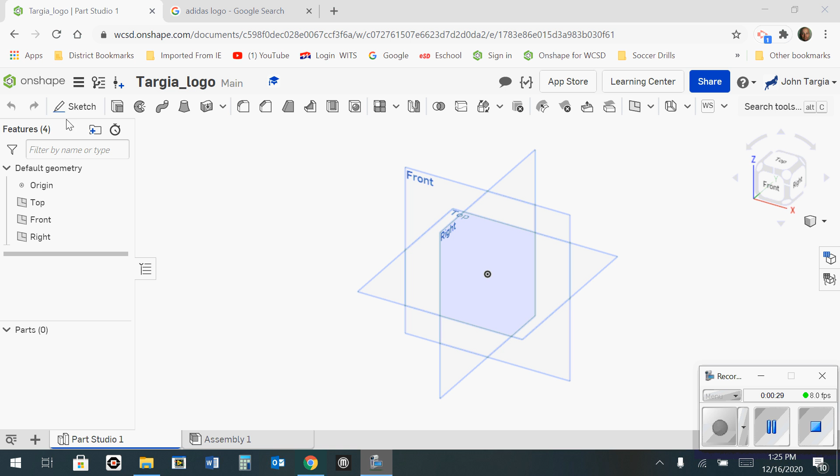So the very first thing you need to do is you're going to need to start a sketch in the top view, and then simply look down on the top.

Now it's time to bring your image into the Onshape software. So the image tool looks like this one right here. You click the drop down arrow and you go to insert image.

At this point you have to click a button that is not shown because the screen is zoomed in too far, so you're going to need to use Control minus on your keyboard in order to see the import option at the bottom of this window.

Now that it's visible, I'm going to click on import. Find the image that you saved either from Google or another file that you had, and then hit open.

It will load up into the software. You can now close this window here and select the image that's been brought in.

And the next thing it's going to ask you to do is to draw an image rectangle. Simply click in the middle of your screen where the origin is located. Click once and drag up and to the right until it basically takes up that upper right quadrant, and then click a second time. Now that image is on sketch 1.

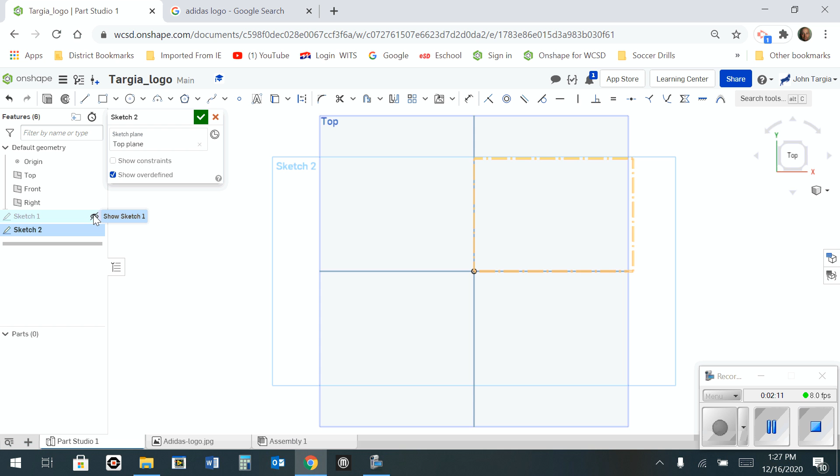What we want to do now is click the green check mark to finalize that sketch. Start a second sketch, also in the top view. This will allow you to work over the first sketch and turn the view of that sketch on or off in order to see your progress of your drawing on sketch 2.

So the next thing you need to do is to start using the tools that are available to you in your sketch in order to go over the drawing and the picture that you plan on creating a logo magnet project on. So I'm going to start by using my line tools, and you can zoom right in on here and start basically tracing over the design.

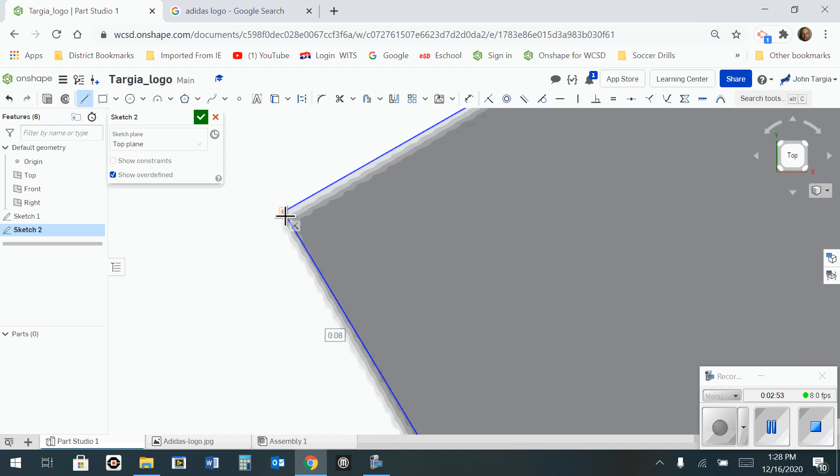Making sure that you are snapping from point to point, and especially when you close it off, make sure that you get right on the points so that every part of your drawing is enclosed.

And I'm going to work my way around all these shapes, including the letters. The letters I will be using circle tools and rectangle tools. For this A, I'm going to use a circle tool. Try to get as close as you can to the middle.

You could use the same center point for the second circle. And I can use a rectangle for this part of the A here.

And once I do that, I can then grab my scissor tool, which is my trim tool, and I can start to trim away the lines that I do not need to be there, such as these two. And there's my letter A. I will do the same process to complete all the letters.

While working on certain letters, you're going to find that the arc, the rectangle, the line, the circle are not going to be the right tool you want to use.

So in some cases you might want to utilize this here spline tool. A spline tool allows you to go around irregular curves by simply clicking on the starting point, and every time you click thereon after, it will follow the contour of your click.

The more clicks you have, the more likely it is to change the contour. When you're done with your spline, you can double click and it will end the line. Just be sure to snap to that last point when you continue on with your other lines.

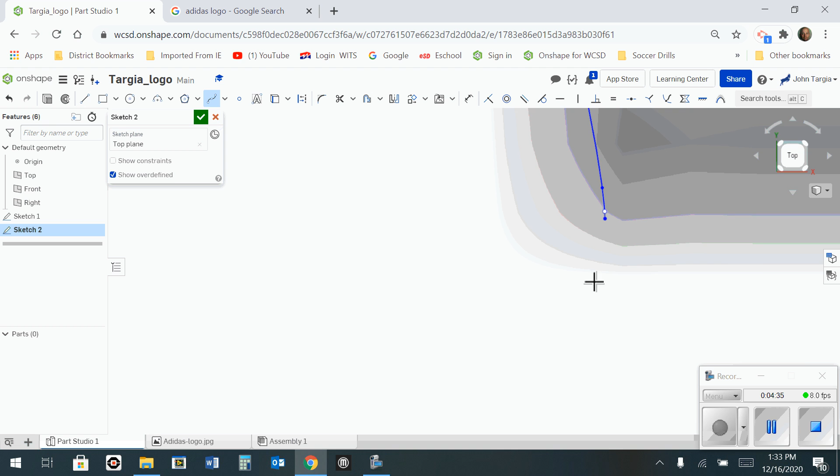So now you can see that I have completed going around all the lines and completing my logo design. So if I were to go back to sketch 1 and simply click on the eyeball, it will hide the image behind it and show my work on top. And you can toggle that on and off as you need to.

So if you take a look at this design as it is right now, you'll notice that each one of these letters and these three stripes are all separated from each other. So if we were to 3D print something like that out, it would actually be separated into many pieces. And what we want is for it to be printed as one piece. So what we need to do is to create a background in order to hold all these parts together. So that's what I'm going to do now.

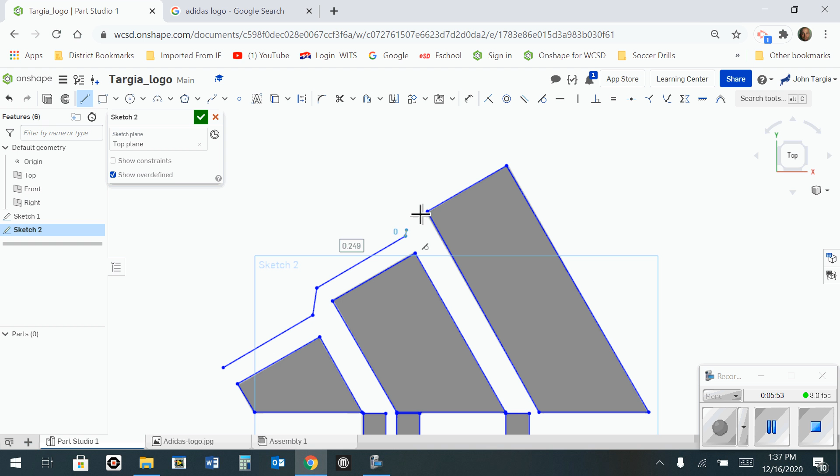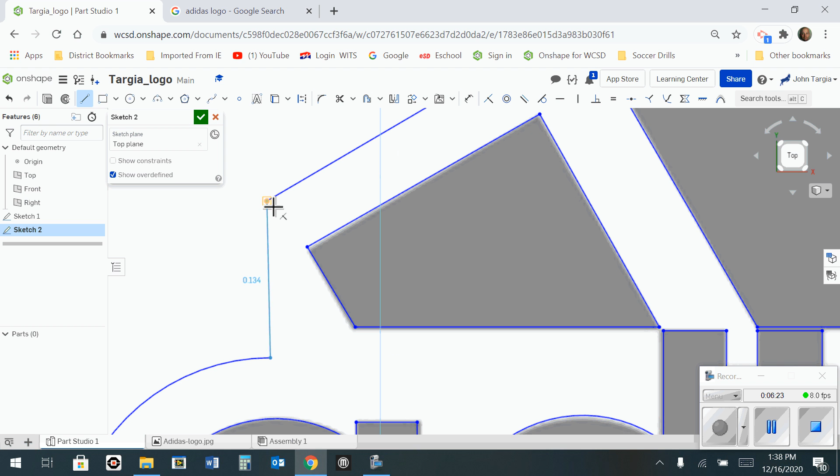I am going to start by using my line tool, and I'm going to try to keep my offset, my distance from my shape, consistent all the way around. So if I were to start here, I would then simply work my way around all the shapes within my design. And there you have my finished drawing. Now I can simply hide sketch 1 so that I can just see my shape here.

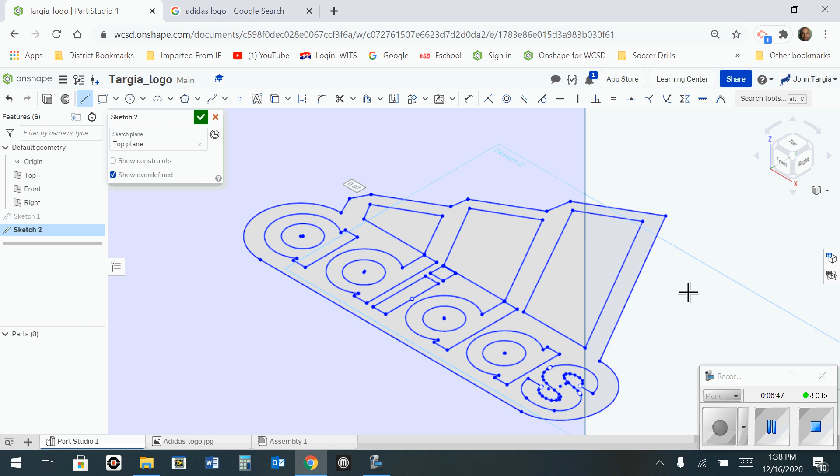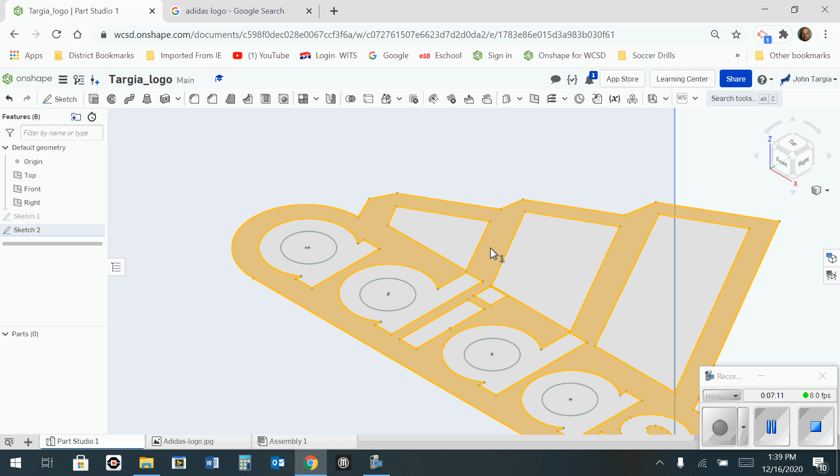The next thing to do is to take a look at this in isometric view, zoom in, and now I can start to extrude the shape. So the first thing I want to do is press the escape key to get off all my tools. And you can press the green check mark to finalize that sketch right now. And then I can zoom in and select the areas that I want to first extrude. So the first thing I want to extrude is the background plus the insides of my letters.

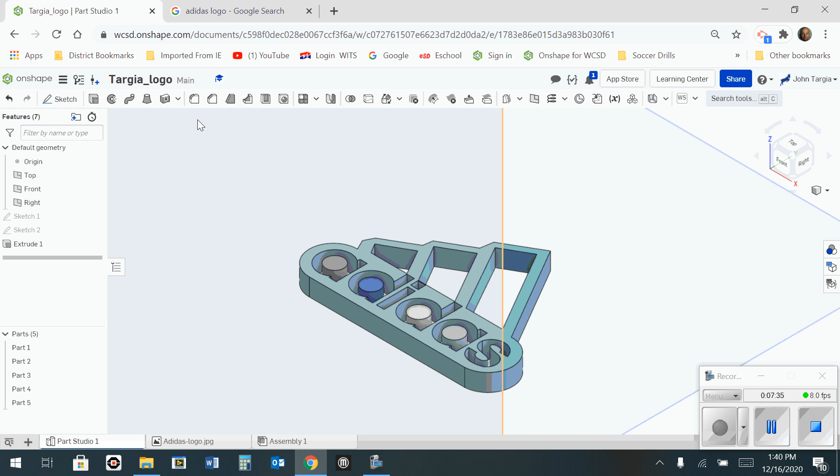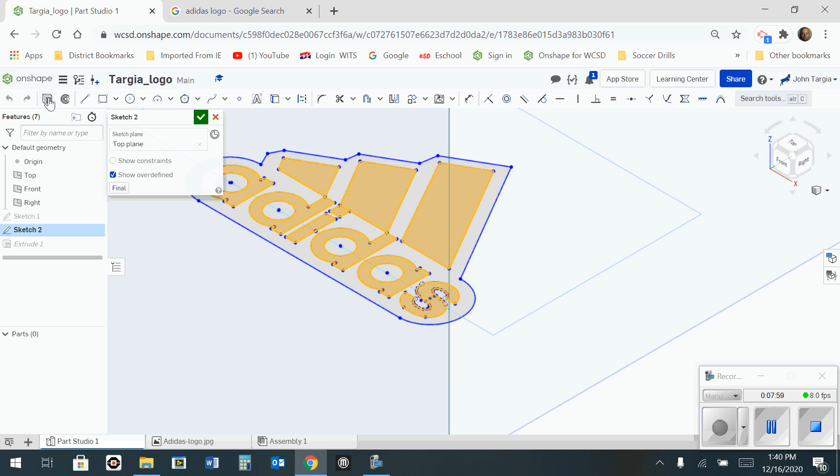And I want to extrude that at a distance of 1/8 of an inch. And hit enter and hit the green check mark. Then I want to go back and double click into sketch 2 again. And this time I want to select the three stripes and the insides of my letters. And now I want to extrude that at a distance of 3/16 of an inch. And hit the green check mark. Now I have my finished product.

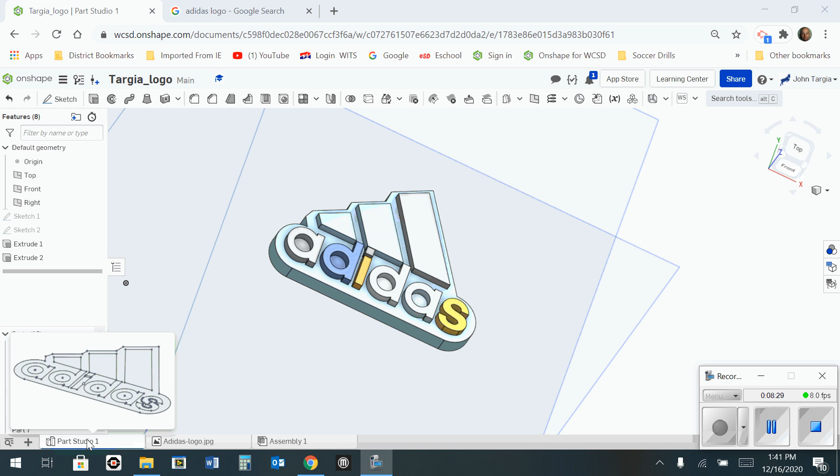When you're all done with your 3D logo, you want to go down to the bottom of your page where it says Part Studio 1. And you want to right click and export. When you export, you'll have this window pop up. And the first thing you should do is name it the color that you want it to be printed in. So for example, I would name this blue,

and then my name. You want to make sure the format is in STL, and you also want to make sure that the units are in millimeters. And when that's done, you can simply hit OK, and then tell it where you want to save it. Once you click Save, it should now be in your files.

So the next thing to do would be to go to Google Classroom and submit this project, turn it in so that Mr. Targia can then 3D print it for you. And make sure that the file that you submit is that STL file. It will have the .stl after it. In this case, mine was called bluetargia.stl. And that's it.